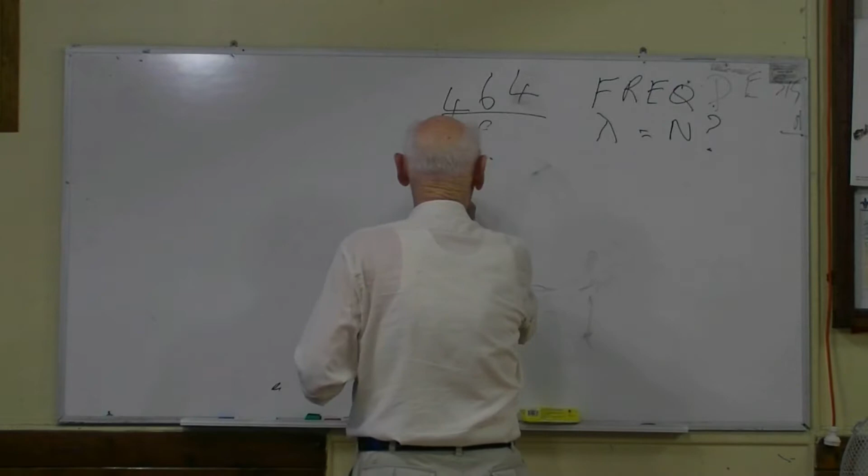Okay, so here's our length, 464 over F. So we go ahead and cut our antenna. Let's say, for argument's sake, I'll get my calculator out here. It's talking to you. Okay, we're going to build a 40 metre half-wave dipole. So we put in all clear. 464 divided by 7.1 equals 65.3521126.

65.3 feet. And now that we know it's going to be roughly 66 feet apart, we need 2 masts to hold it. Ideally 3, as a matter of fact, because you have sag in the centre. If you have 3 masts, you can lift the centre up where it should be, not down, but up there. So ideally 3 masts, and you need slightly more than 65 feet between them, about 66 feet.

So you get your wire out, hook it up, cut it to length, put it on insulators, and finish up with something that looks like this. This is an insulator at the end, and that's an insulator at the other end. These are halyards which you use to pull it up, and in here you feed it by whatever means you've decided to feed it. Ideally it should be coax cable, but there are other ways of doing it. Now you put it up and check it for operation.

The best way to do this, if available, is with various forms of antenna analyzers, which come in a wide range of prices. There's a relatively inexpensive one made by MFJ and it works all right. There are others which are more elaborate, giving you a computer output, which is valuable because you can store the results and later do another test to find out if it has changed, in which case you can do something about it. But if you only have pencil figures of impedance or SWR at various frequencies, you've got to keep that in a book somewhere so you can get back to it.

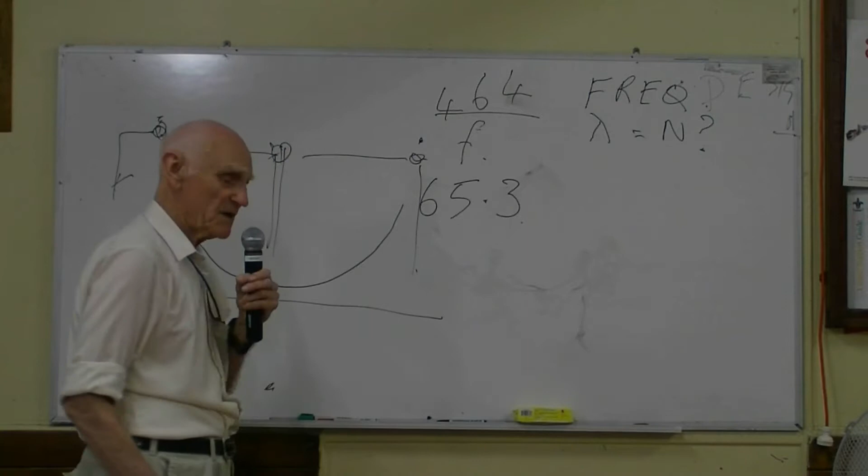Okay, so you check it out. The simplest way, if you don't have special gear, is to draw yourself a chart and check the SWR across the frequency range. Now, the position of minimum SWR tends to be the resonant frequency of the antenna. There are other snares involved here, but let's assume for the moment that's a perfect statement.

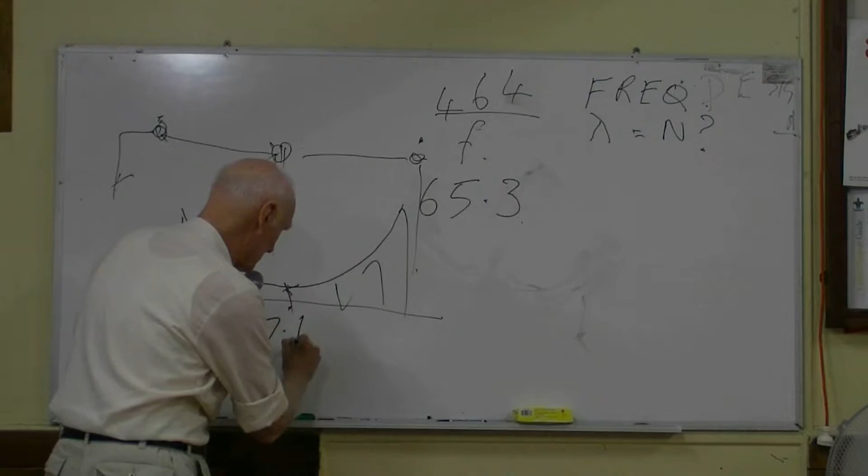Okay, let's say you've already designed it for 7.1 megs, but when you did the testing, you found it wasn't 7.1 megs with your antenna. It was somewhere else, might have been, say, 6.9. This is not where you want it to be. So what can you do about it? The result you've got is the result you're getting at your particular installation, due to the capacitance of your antenna to ground, probably to the roof of your shed, or the next door neighbour's shed, or his car parked in the yard. All of these things can change the resonant frequency of your antenna slightly.

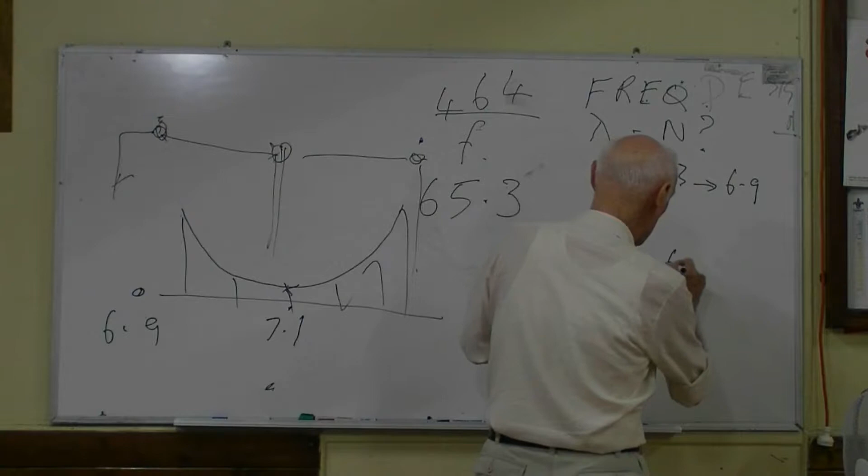However, you are stuck with your environment. If you have actually measured the length of the antenna, let's say you cut it to be, what did we say, 65.3? Yeah, 65.3, and that gave you 6.9 megs. So one thing you can do is some reverse engineering and calculate backwards. So in this equation, you've got a constant divided by 6.9 equals 65.3. So you multiply those two. All clear.

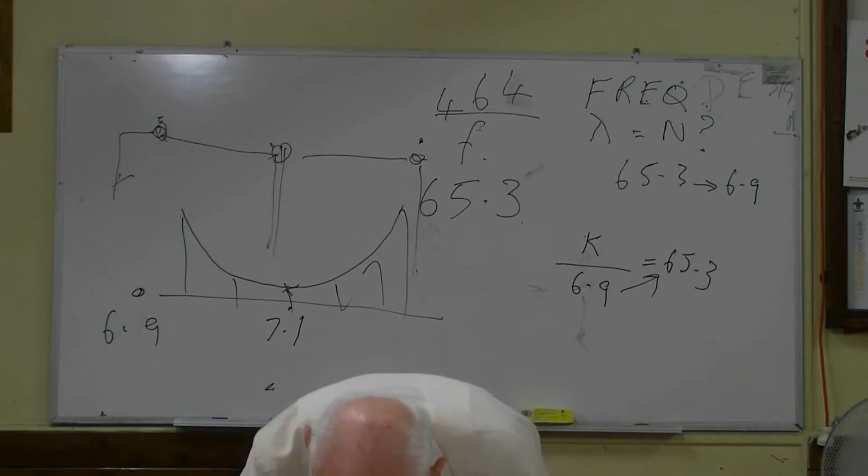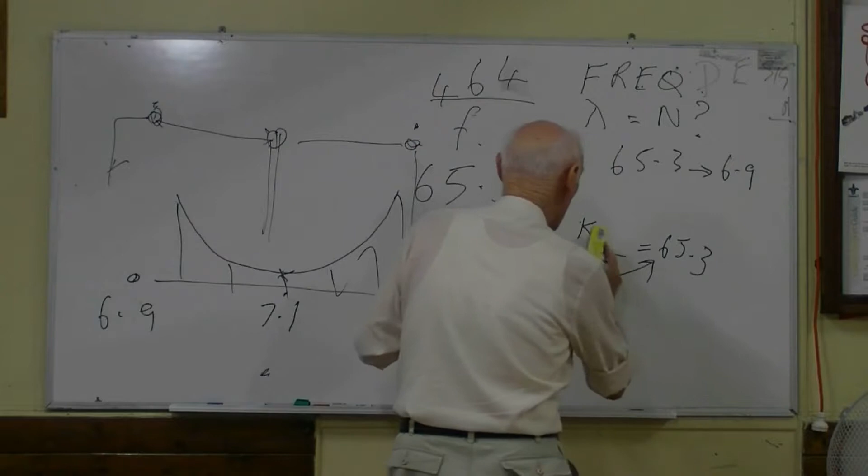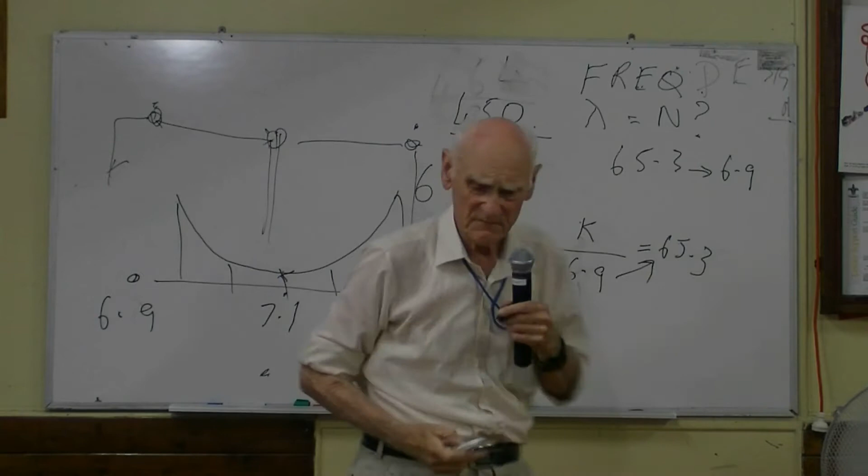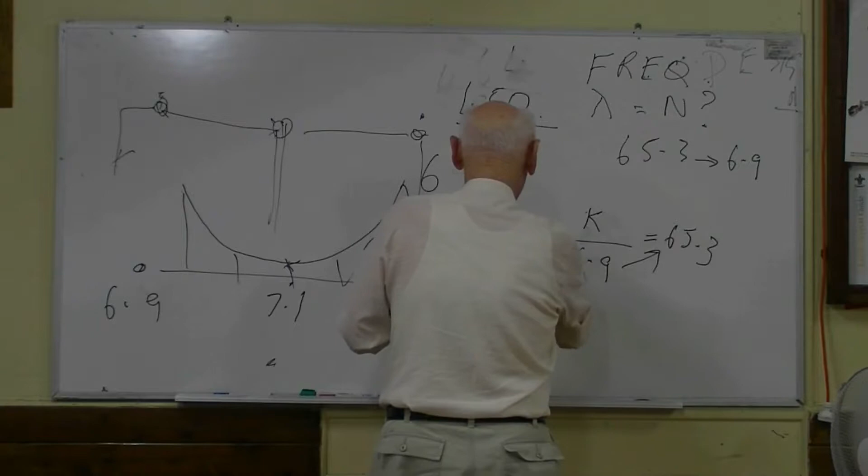6.9 times 65.3 equals 450.57, so 450. We know that in our particular environment, the correct constant to use in this equation is not 464, it's 450. So we still want the antenna to resonate on 7.1 megs, so we do that. 450 divided by 7.1 equals 63.38028169, so 63.38. So you know now that you have to adjust the antenna to that length.

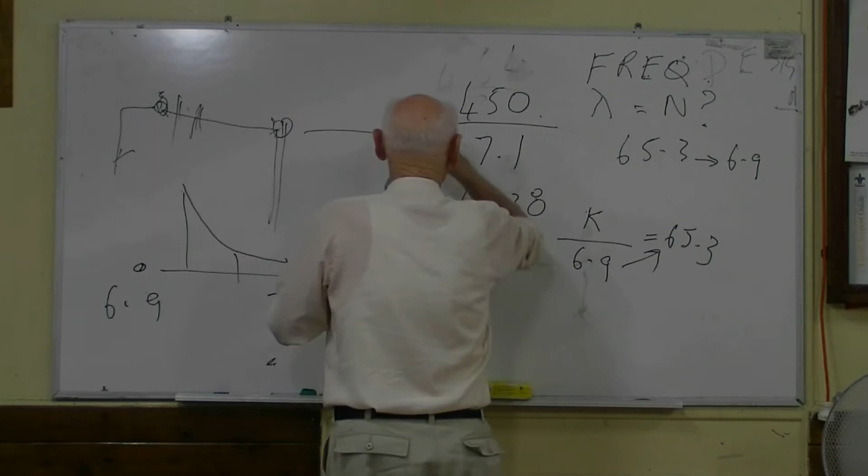That's the simplest way to do it. You can, of course, crawl up and down, or lower the mast at each end, chop 2 inches off there, chop 2 inches off there, put it up again, do the measurements, do another curve, chop another 2 inches off here, chop another 2. You could spend the rest of your life at that. You'll probably eventually get there. But I have a friend who went through this exercise recently, and he did it 6 times. He thought, oh, to hell with it, and he cut off 6 inches at each end, and he got it fairly close to the mark.

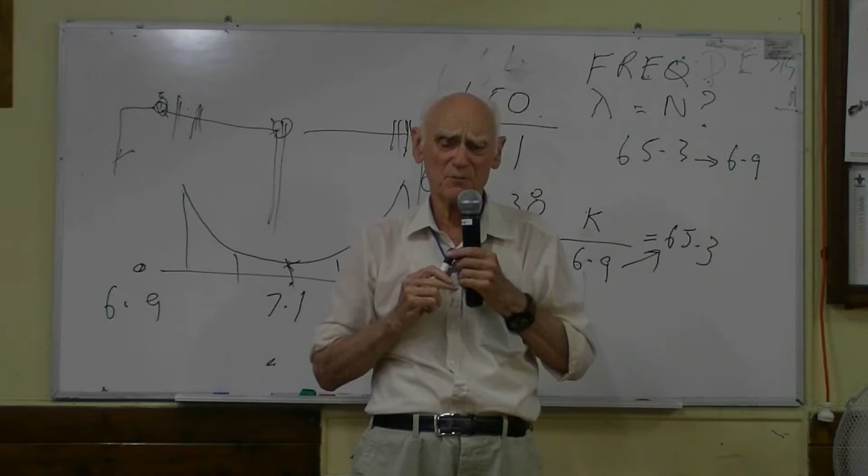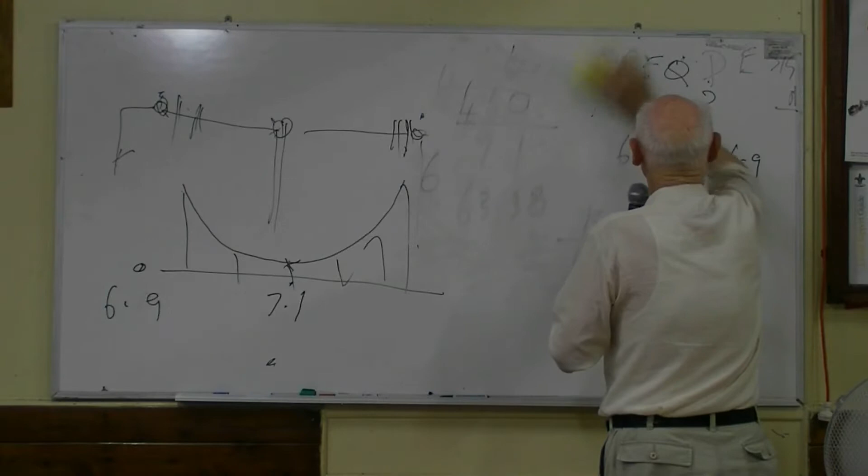Now, in comparison with this, I had Chuck help me put up a new 40-metre antenna some time ago, and it was an off-centre fed dipole, which is sometimes called a, what do we call it, something Carolina Windom, yeah, something like that. And I have grave doubts about the virtue of having an antenna which is not balanced, but in this case I needed to do it because I had recently put up a 3-element Yagi for 20, 15, and 10, and my G5RV was causing great problems because it was beautifully resonant at 20 metres, and it totally stuffed up the pattern of my Yagi. So I had to take down the G5RV, and I needed an antenna for 40 metres.

Well, by using the off-centre fed one, I had a situation like this: northern mast, shed, southern mast, central mast. Now, by using the off-centre fed antenna, I was able to do that. Insulator. And the Yagi, which was about here, was therefore somewhat divorced from the new antenna in comparison with the way it was with the G5RV. So it now works fantastically well as a transmitting antenna, but don't ask about the noise.

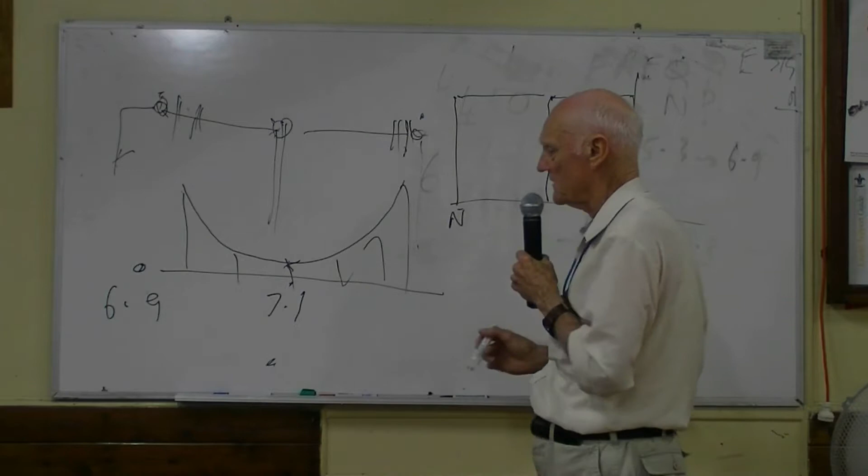Okay, so I now found that I had to change the length, so we dropped it down, we measured it so that it conformed to the new calculated length, put it up, hooked it in, did another frequency run on it with my MFJ impedance bridge, and we found it was resonant at 7098, and I said, Chuck, that's close enough. So this technique gives you a way around it. That parameter, that 468 that you find in the textbooks, it's pretty close, but it's not the figure that you're going to get at your location. How close it will be will depend largely on all those other imponderables that the guys who wrote the antenna handbook didn't know about, didn't know that you had in your backyard. So this gives you a way around it.

The next thing is that I'm reminded of a film that featured Danny Kaye. I can't remember the name of the film now. It might have been Danny Kaye Wonder Man or something like that. Anyway, he started off by saying, 'This is a story, and like any good story, it has a beginning, and a middle, and an end.' And that's the way it is with aerials. They have a beginning, they have a middle, and an end.

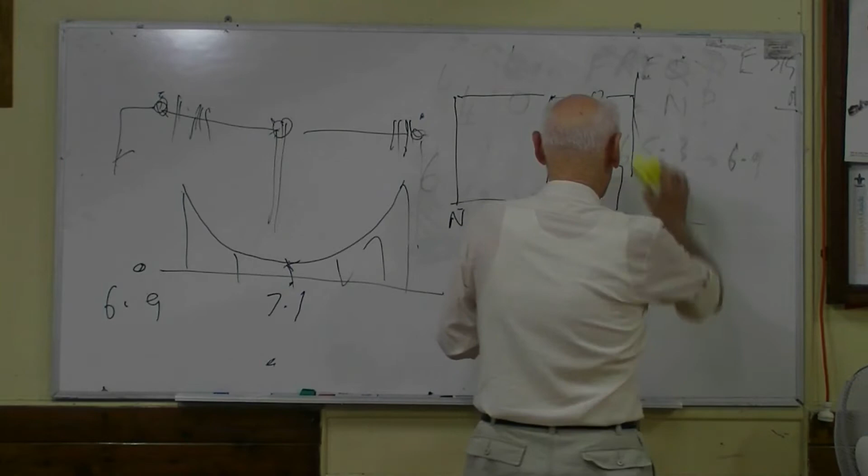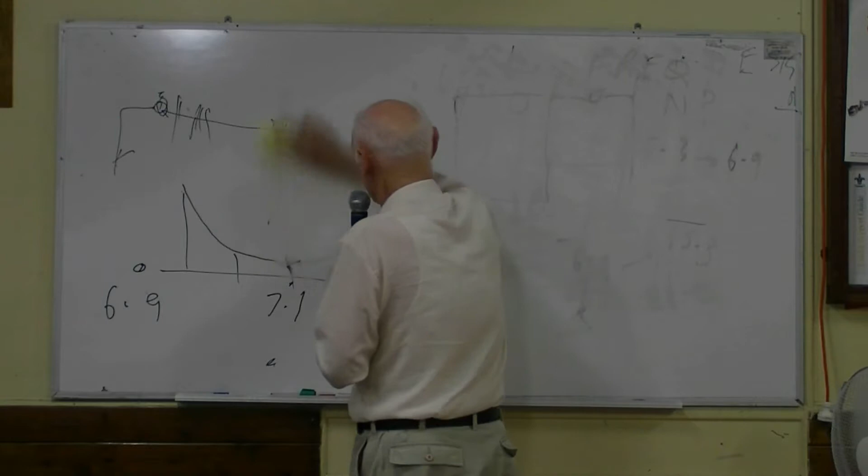By means of coupling into one of those three areas, you can actually get it to accept power and radiate your fantastic signal all the way around the world. So you have to decide then exactly how you are going to feed it. Are you going to feed it in the beginning, in the middle, or the end? And that will determine largely the sort of feed line which you are going to use.

Now, when you talk about dipoles, you tend to think about centre-fed antennas. And who can tell me what the impedance is at the centre of a dipole? 75? 75? Any more starters? 72? 72? 72? Anybody else? Okay, well, I didn't give you all the information. The correct answer is, well, it depends. And it depends on what.

I need two strong men. Advance front and centre, please. Check the seats. Put the young bloke up.

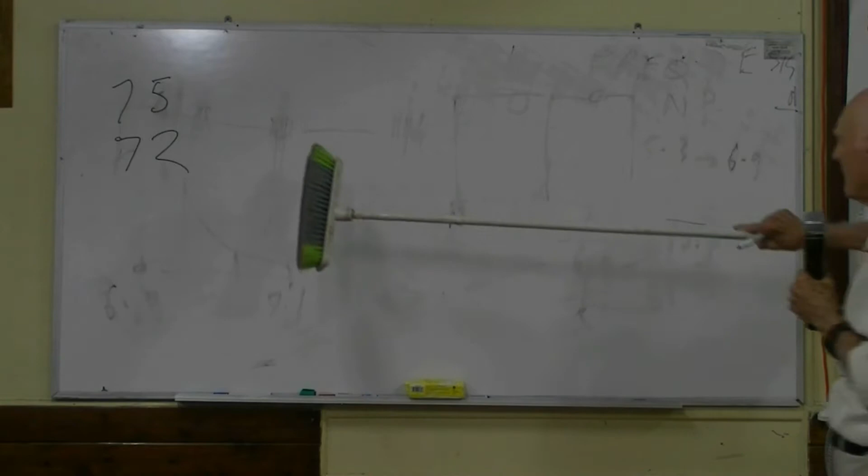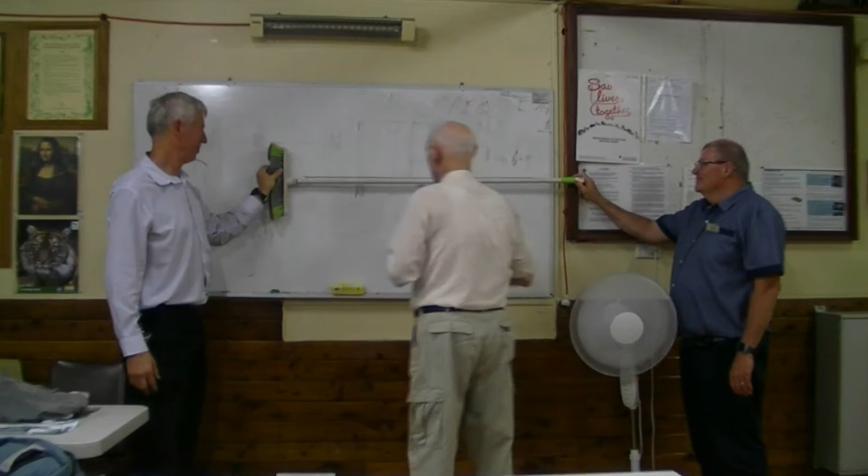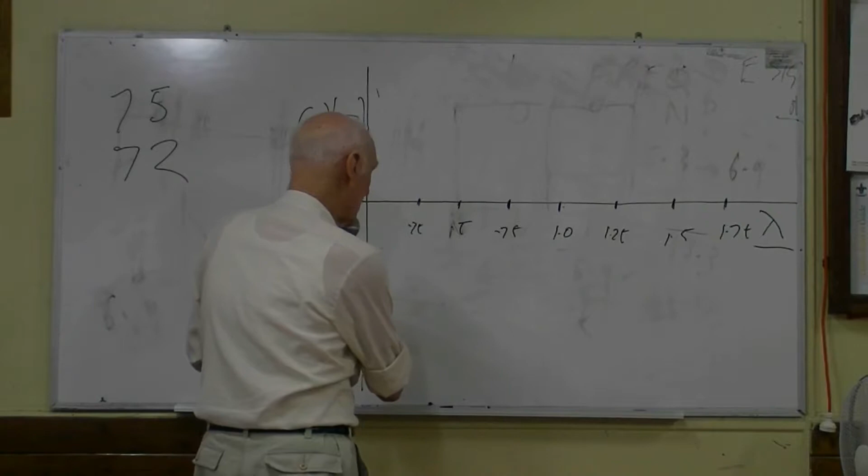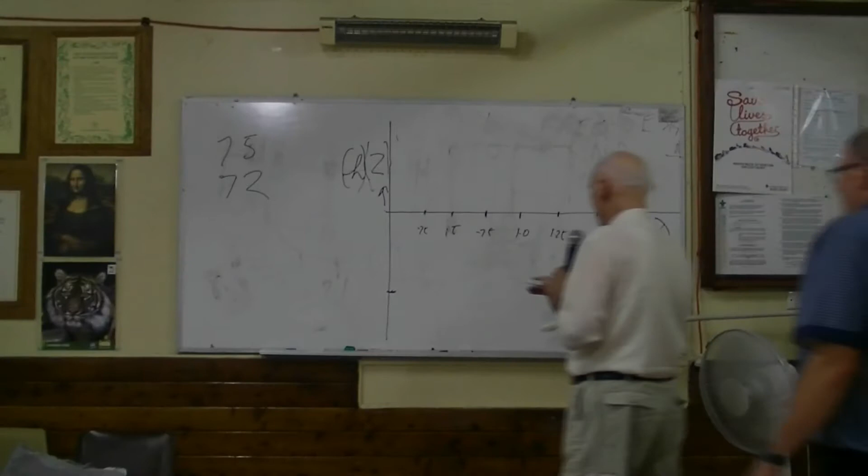I need my two men again, please. You need the broom. Okay gentlemen, I want to draw a line across there, parallel to - up a bit there I think. Up a bit. Cool. Okay, there we go. It's a wonky broom.

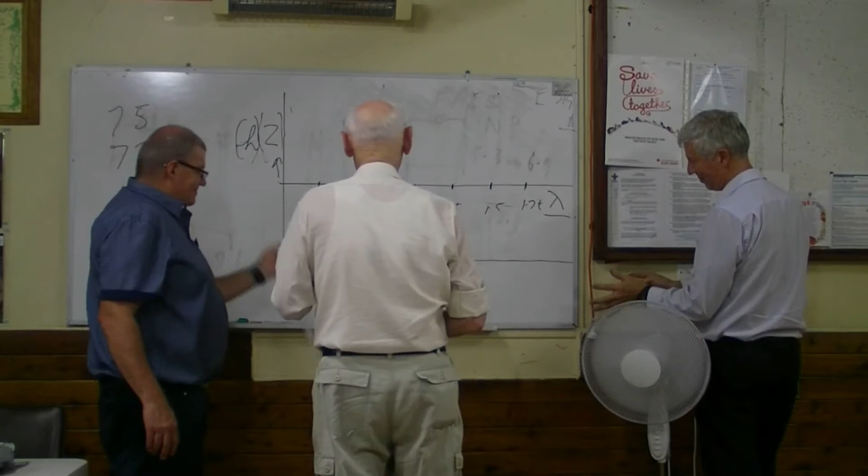When this is zero height here, ground level - if you have your half-wave dipole at a very low height, impedance is somewhere down here. Don't ask me exactly where, because it depends on where the real ground is. If you live on the beach, that's one figure. If you live in the mountains, it's somewhere else. If you live in my place, it's about 3 feet above sandstone. So you measure the impedance at various heights, and you get a curve that goes something like this.

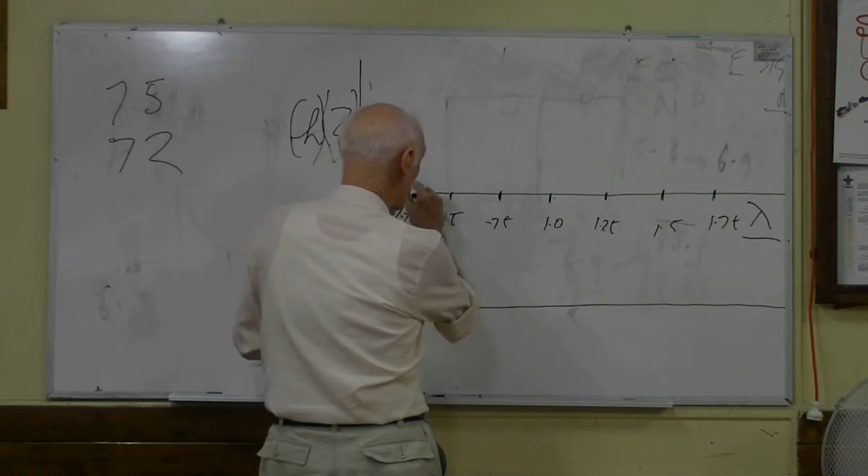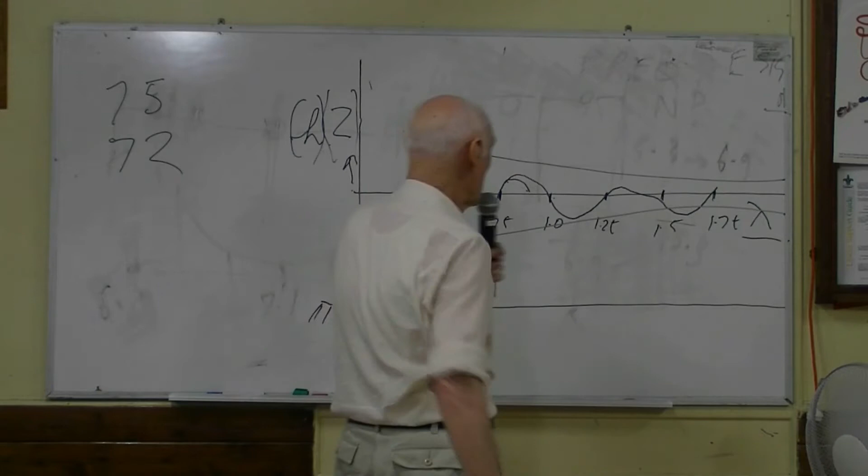And in fact this curve is like that. The mathematicians will say that if you take it out to an infinite height, this curve is asymptotic to 73 ohms or thereabouts. So the actual impedance depends on the height above ground.

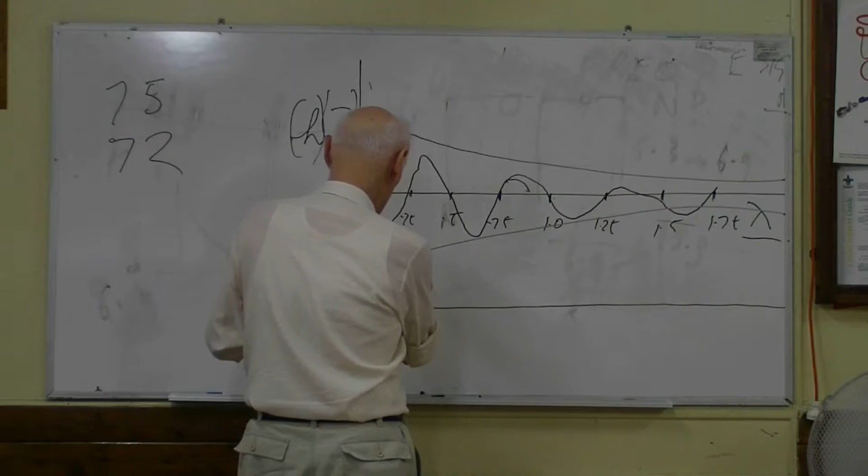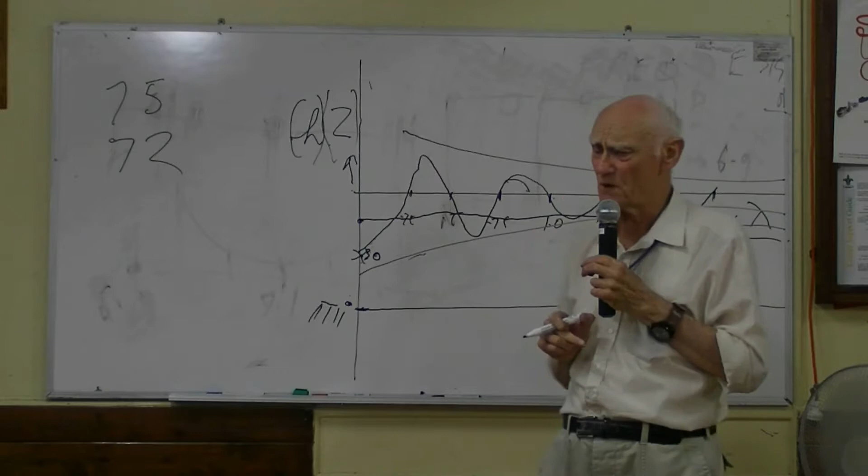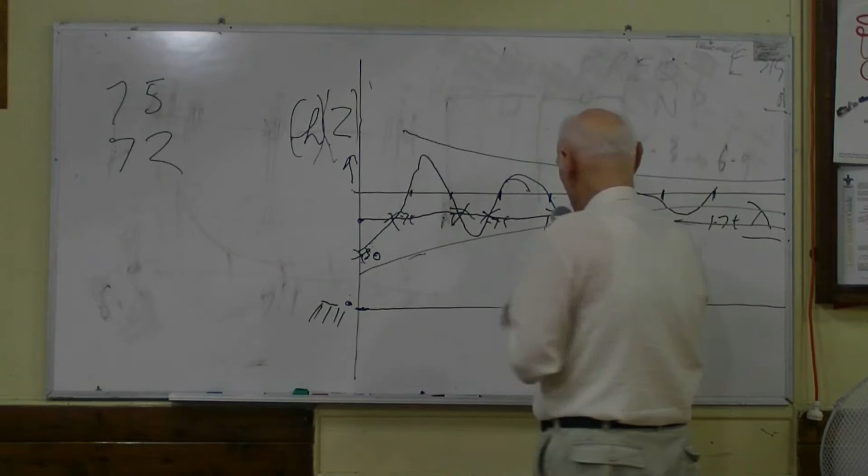So we tend to think of the best antenna as the highest one you can get, and there are good reasons for thinking that way. But if you're one of those people who think it's absolutely important to have the SWR as close as possible to 1.0, by picking a height at which it's 50 ohms you can achieve that much more readily. That means it may pay you to raise or lower the antenna if you're trying to get the impedance as close as possible to 50 ohms. Personally I have never done it, but I know people who have and claim it was worth the effort.

There is a snag here, of course, and what is that? Well, we are fortunate to have more frequencies available to us than the armed services, and we should think about that. The point is we can operate over a wide range of frequencies.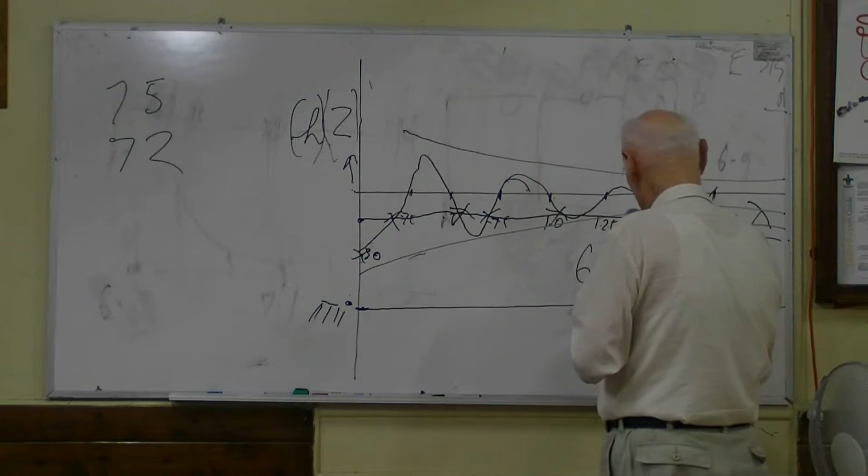So what is a quarter wavelength? A quarter wavelength at 80 metres is about 66 feet. At 40 metres it's about 33 feet. At 20 metres it's about 16. By the time you get up to 10 metres it's only about 8 feet. So if you select the height for one particular band, it's not going to be much good for the other bands. But if you're aiming for a particular band, it's worth thinking about.

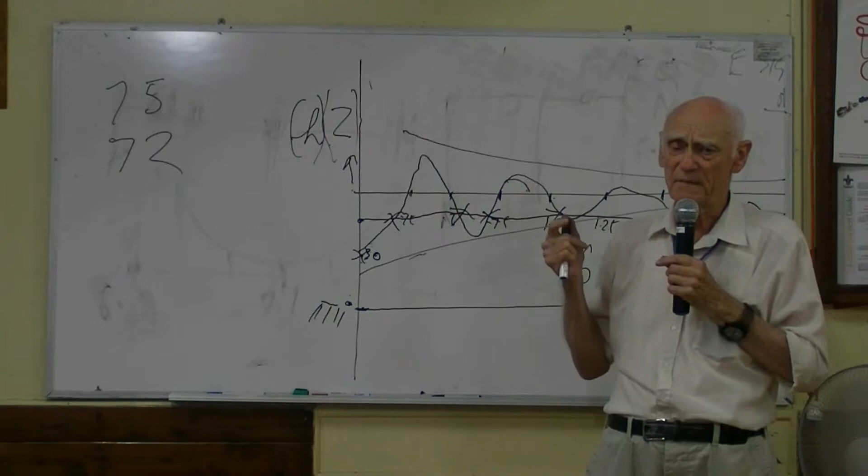So we can arrange it, by suitably adjusting the height, to get the feed impedance at 50 ohms instead of the 73 we've all learned at mother's knee. And you can feed it with 50 ohm cable and a 1-to-1 balun, and that works out rather nicely.

But what about if you don't have any coax cable, or can't afford it? Coax cable was known around 1940, but hams couldn't afford to buy it. Some idiots started a war, and as a result they started putting radio gear on ships, where it became necessary to have shielded cable up to the antenna to cut down noise, and for various other good reasons. When there's a war, there's always money available for developmental work, and probably the area where the money was best spent was in the development of coax cable. After the war it became more popular for hams because we could get it in all sorts of ways - like the stuff I had, which probably came back from Morotai, and was green with verdigris, but it worked after a fashion.

My theory about antennas is they all work. Some work better than others, but generally speaking we can't tell the difference. For most of us, the criterion is you put it up and you make contacts, but you don't really know whether you should be doing better by making some other changes. If you listen around the bands, you'll hear that some people have much better signals than others, and it's not always due to the fact that they're running a kilowatt.

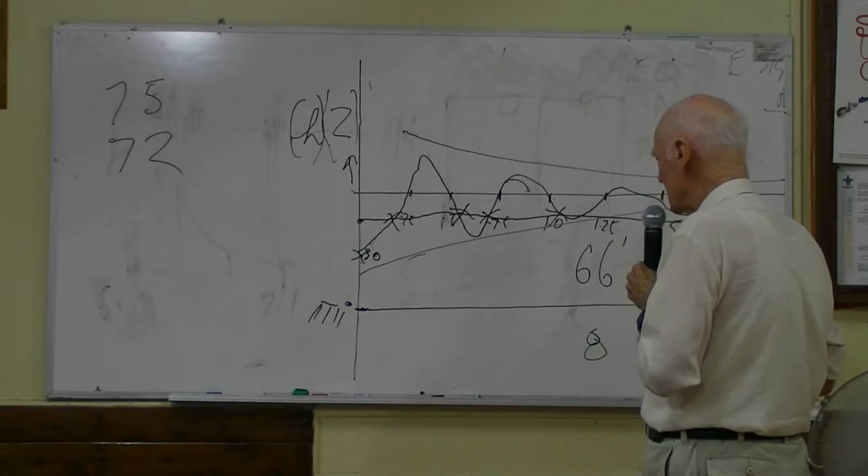You have to decide what you're going to use for coax for feed line. I've lost my...

Before the war, hams used stuff called open wire line, made out of copper wire and things that nowadays you'd call paddle pop sticks, although I don't think there were any paddle pops in 1938. You have two wires and a series of insulators across. The people who could afford them in 1938 used Pyrex glass insulators, and there were some beautiful insulators made. They sort of looked like this.

They were a corrugated thing out of Pyrex glass, and you could subject them to a hell of a lot of strain. You just put the wire through here on one end, through here on the other end, and it took a lot of breaking, although I understand rifle fire was very satisfactory.

So you can use open wire line. The surge impedance of the open wire line is a function of the spacing between the two wires and the gauges of the wires. In the ARRL handbook, which I suggest is probably the most valuable book you could ever obtain, there's a series of charts which will enable you to come up with that.

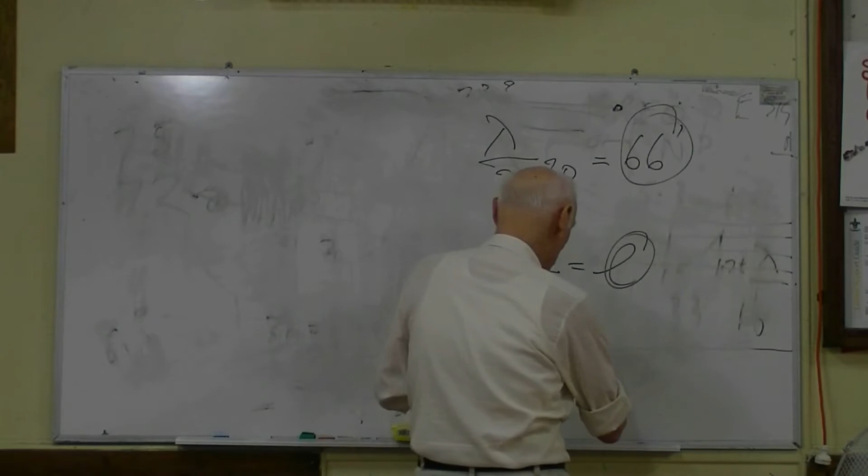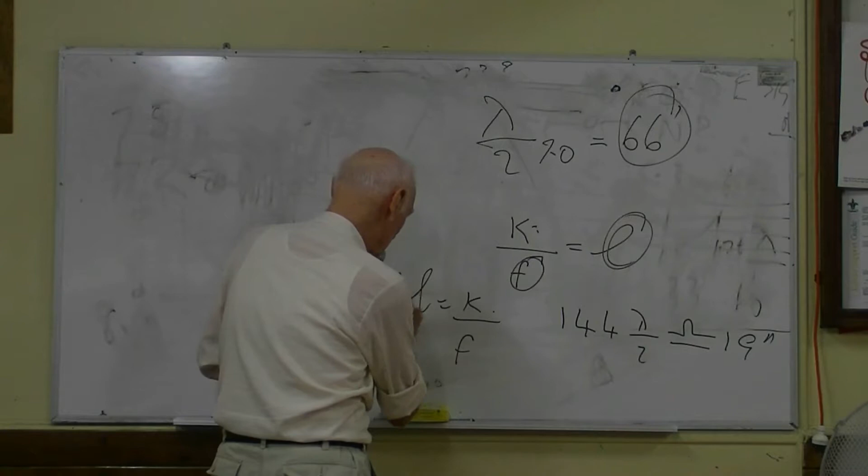Much the same thing applies at VHF. If you remember that 144 half wave is about equal to 19 inches, the same thing applies here: L equals K over F, the parameter divided by the frequency. So 19 inches equals L over 144, or maybe 146. You multiply those two out - let's say we decided it's 146. All clear: 1,4,6 times 1,9 equals 2774. So this constant here is 2774.

I happen to know that's not right - I think 2640 is closer to the mark. So maybe that wasn't 146 megs, maybe it was 144. Let's try again. All clear: 19 times 144 equals 2736. Okay.

That's interesting - anyway, that's the basic principle. But before you do the exam, find out what the ARRL says that factor is, because obviously I didn't remember it correctly. Max points out that's a quarter wave up there, not a half wave - absolutely right, 19 inches should have been 38 inches. Thank you for picking that up. All right, so the half-wave dipole is probably the most commonly used antenna.

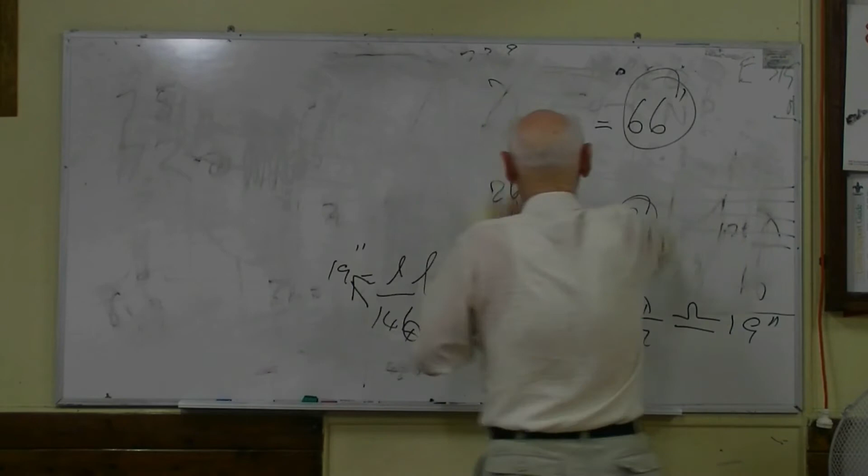Nowadays there is a problem, and that problem is noise. It's said that a loop antenna is much less sensitive to noise pickup because it's basically picking up energy from the magnetic field, as distinct from the electrical field. Probably the most convenient way to build a loop for those of us with only small backyards is to use the delta loop.

The virtue of the delta loop is that you only need one mast. There are various ways you can build it. You can make your antenna like that, and feed it up there, or there, or there. In other words, it has a beginning, a middle, and two ends.

Such an antenna has an input impedance of somewhere about 100 to 120 ohms. I mentioned earlier that I'm now using an off-centre fed dipole, which also has an input impedance of about 120 ohms. To cope with that, I use a special balun with two transformers: the first converts from 50 ohms to 120 ohms, the next goes into a 1-to-1 balun, so it comes out at 120 ohms into the antenna feed point.

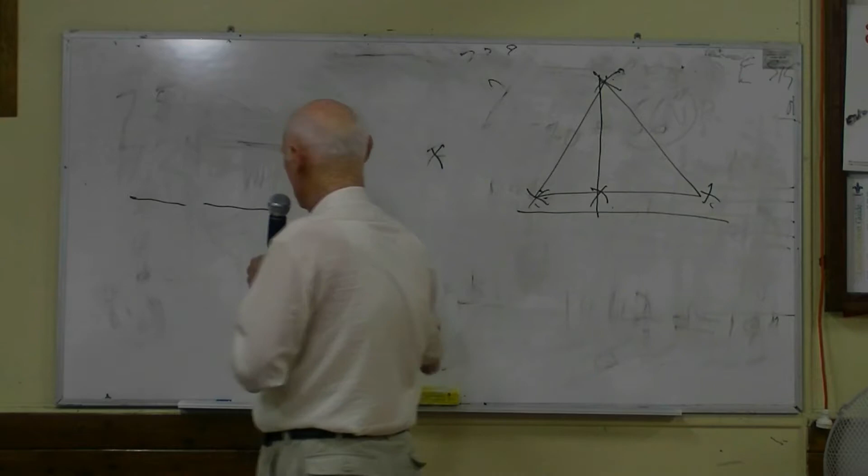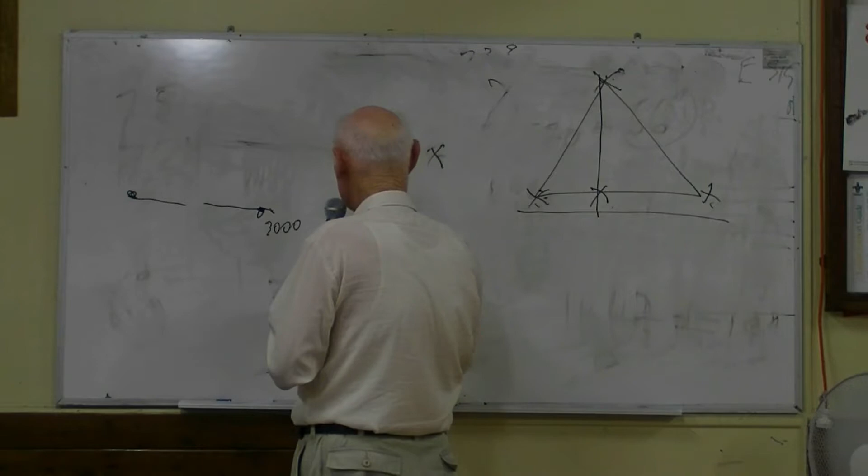If you have an open antenna such as the half-wave dipole, where is the end? It's called end effect - you've got this thing with a finite impedance, somewhere about 3,000 odd ohms, maybe at the end. But this is quite different: it's not open circuit at the end, it's a continuous antenna. So end effect is different in this situation compared to that one.

So a one wavelength loop doesn't conform to the other dimensions you've made. In fact, for a one wavelength loop, it's roughly calculated like this. If you want to make up a delta loop for 7.1 megahertz: 1002 divided by 7.1 equals 141.1267605.

141 feet. Now, what would you have thought one wavelength would be at 40 metres? What did we calculate was a half wave earlier? 65, wasn't it? 65, exactly - so that was a half wave. So you'd think if 65 was a half wave, the full wave would be 130. But we just calculated 141 feet. This shows the difference between the end effect we had to consider with the half-wave dipole's open ends, compared to a closed loop antenna.

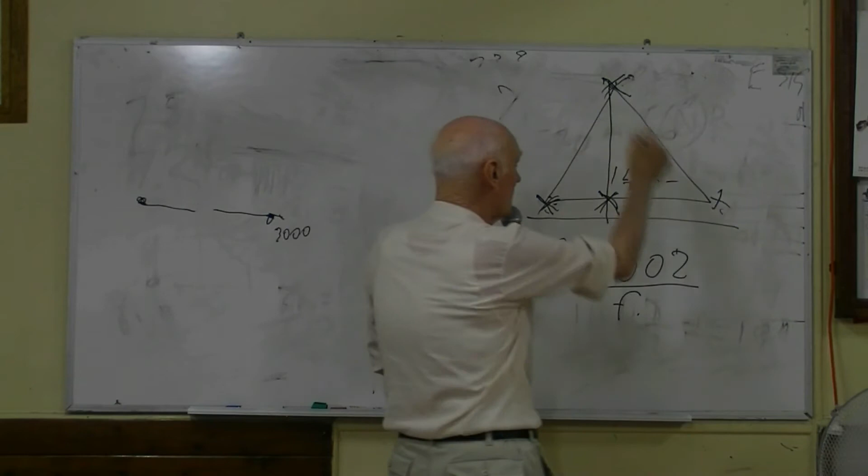The feed point is about 120 ohms. Exactly where you feed it will depend largely on where the major polarization will be. If you feed it here, it's largely horizontally polarized. If you feed it up here, it will tend to be largely vertically polarized, and down here it probably can't make up its mind. That may be an advantage because there may be directional effects - it may be that feeding it here makes the directivity tend that way.

How can you check this? There is a method available to all of you, and I'd say probably none of you have thought about it. That's what I'm trying to do tonight - help you develop the capacity to think about these things. Does anybody have any idea what I'm alluding to? Okay, not a dog stirred.

I think it would be true to say that every one of you here would be entitled to operate on the 2 metre band, 144 to 148 megacycles. Let's say, for argument's sake, that you want to put up a loop for 20 metres. I know some of you can't operate there, but this will give you the incentive to work towards it.

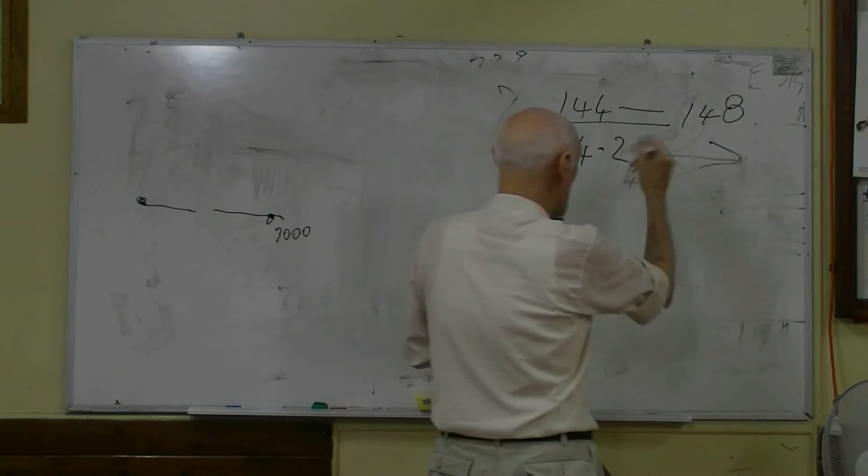You divide 144 by 14.2. What's the answer, roughly speaking? 10. Exactly. So that means in your own backyard, you could very easily make up a loop antenna of this type, cut it for 144 megahertz, and go around with the field strength meter and investigate the performance. If you had, say, a sheet of galvanised iron underneath it, you could simulate a perfect earth, and then raise it and lower it to see what happens to the field pattern. I look forward to hearing that somebody here has tried to do it.

It's been done before. In fact, it is the technique used by the National Bureau of Standards when they come up with a design for a new antenna. They do their modelling probably at microwave frequencies because the measurements are a lot easier and they have access to perfect antenna ranges. We don't. We have our backyard, or maybe a field day. There's one club that every year goes to Alice Springs or Innamincka or somewhere, and they play with all different sorts of antennas, investigating the effect of different feed systems and heights and so on. You can do that in your own backyard at 2 metres. And as I said before, I look forward to hearing somebody say they have done it.

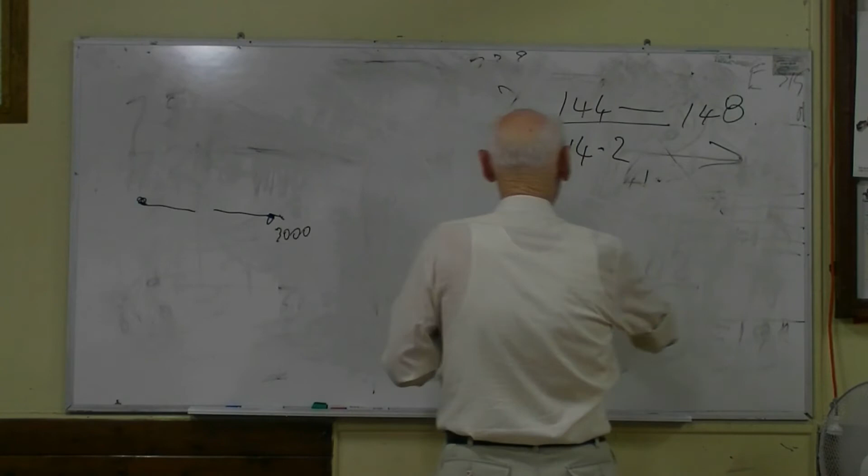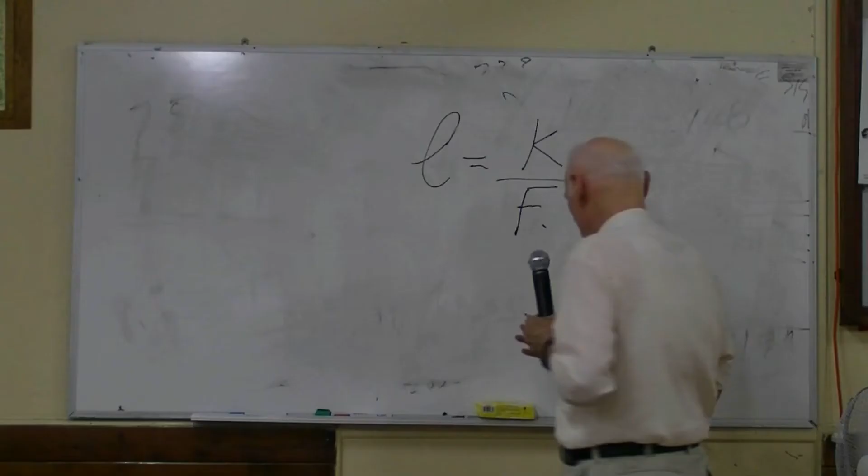Now, there are other sorts of wire antennas, and at some stage most people come up with the idea of using a vertical. That's not a bad idea, you might think. Why? The idea of using a vertical, because it doesn't need a lot of real estate.

Have you ever visited a broadcast station? Where do they have their antennas? Out in some bloody big paddock, frequently in the middle of a swamp. Why is it so? Well, I think a standard broadcast transmitting antenna uses about 232 radials.

I have met one ham who had a vertical for 160 metres with that sort of setup. The reason being he used to be the technician at the broadcast station. The broadcast station moved. They left the antenna and the earth mat behind, and because he had been the technician resident where the transmitting site was, he bought the house and the antenna. So he now had a perfect 160 metre antenna with 232 radials or whatever it was.

And that's the problem with a vertical antenna. The closer it is to the ground, the more radials you need. If you have it up high, such as a thing like this, four radials work quite well, really do quite well. The snag here is that it has an input impedance of about 33 ohms. Now, again, you want to use that beautiful 50 ohm coax cable that you managed to get.

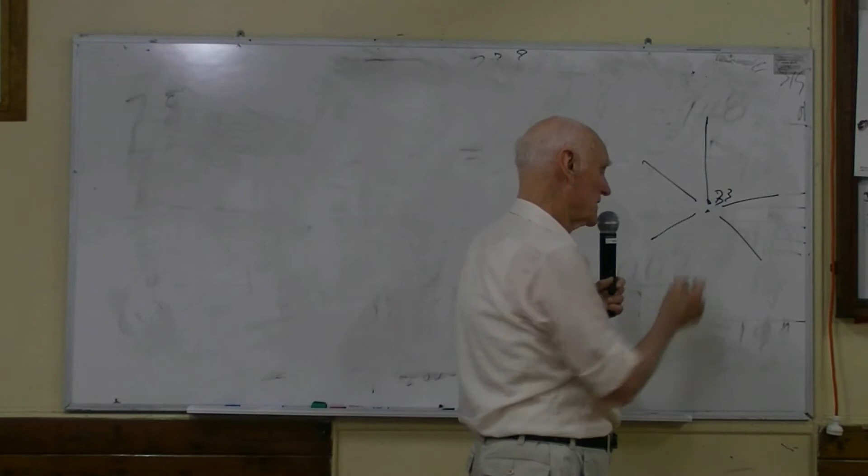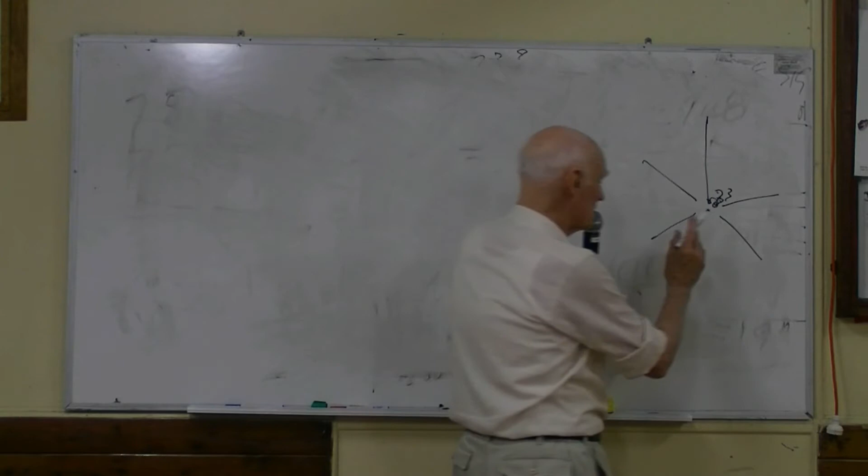So what can you do about it? Well, you can put in some form of a little transformer there, and that works okay, particularly for working at only one frequency. But a simpler way is to actually droop the radials down, like that. And in vertical, it looks like this, okay? You can find a point where by suitably altering that angle alpha, you can come up with a feed point impedance of 50 ohms, which is very nice.

I have a book written by a gentleman called Commander Lee, who was a communications engineer in the US Navy. The Navy's very enthusiastic about verticals, because there's not a lot of real estate on a ship, and you can throw up a vertical and you've got a beautiful ground plane. You've got thousands of tons of steel underneath you, and it works quite well.

But a better way, particularly if you have an antenna you want to use on one frequency - I'm particularly interested in 10 megs because it's a frequency working rather well at the moment, and I'll show you some photographs in a minute - about every decade or so I get out Commander Lee's book and I read it and get very enthusiastic and I put up a vertical, and it lasts about 3 months and then I take it down. So nowadays if I ever feel a vertical coming on, I go and make a cup of tea and take 2 Panadols and lie down and wait till the feeling goes away.

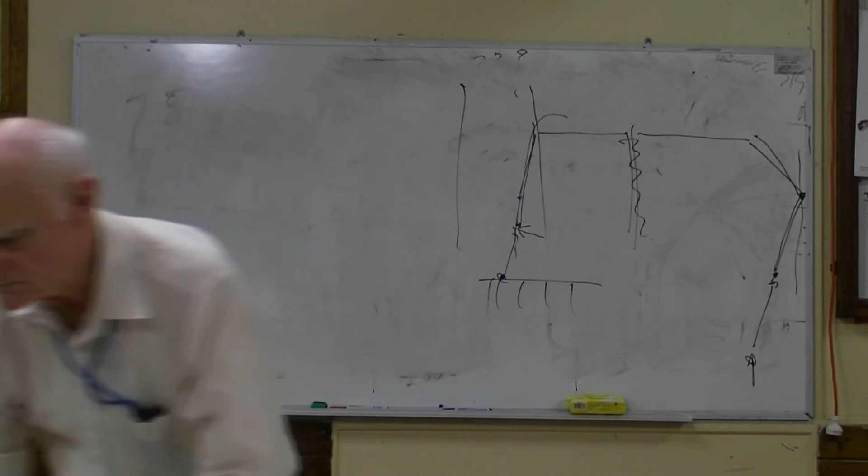Okay, this is the base of my northern mast. It was given to me in 1962 by the late Horry Young, VK2ARZ. He was posted to New Guinea. He was going to lease his house, and he didn't like the idea of leaving his beautiful mast behind. It was made out of a single piece of Oregon, 4 inches by 4 inches, and that's the section you can see there. That's all 4 inches by 4 inches. It was tapered to the top. It was 30 feet long, tapered and rounded, so at the top it was about 2 3/4 inches high. I've had that up now since 1962.

About every decade I take it down for sanding and painting. Unfortunately, that is very difficult to do nowadays.

Was it much binding in the marsh or the Goon Show? I think it might have been the Goon Show. There was a bloke who had this standard catchphrase, 'You can't get the wood, you know.' And that's the way it is. You try buying a piece of straight-grained Oregon, 30 feet long and 4 inches by 4 inches. If you can do it, please let me know.

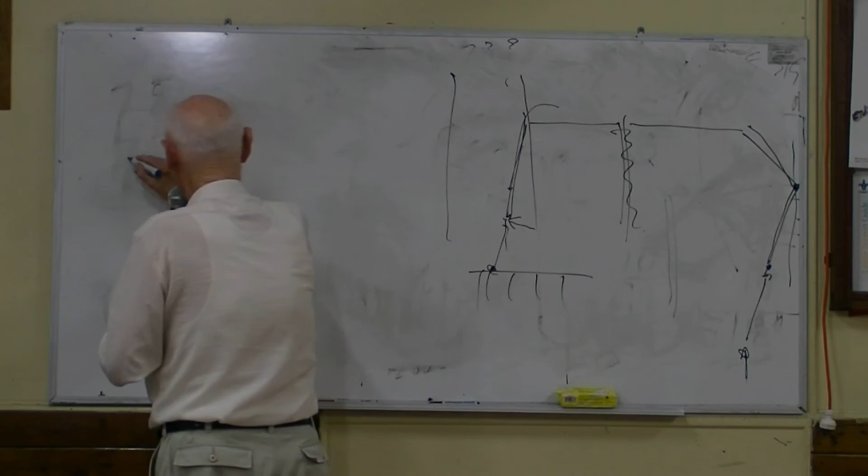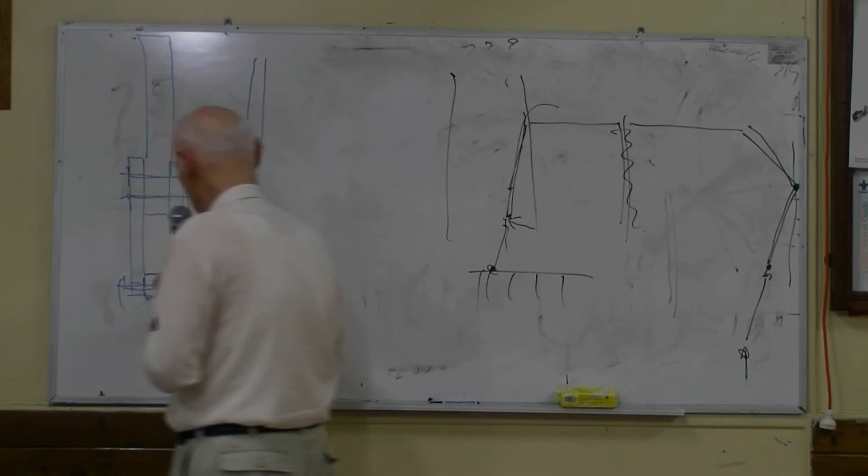If you start off with 2 pieces like that, and then you cramp another piece in there like that, and you then put a piece down here, you can put a bolt straight through it. That's in that view. In this view it looks like this. But in my case, this last little section, I have let in another piece of timber. This whole lot is glued together with marine glue, and then I put stainless steel bolts through with very large washers on them. You have to turn the nuts up tight enough to hold it, but not tight enough to crush the timber. Why do I use stainless steel bolts?

Because bitter experience has shown me that the use of mild steel bolts, plated as they may be, eventually leads to disaster. And it works out this way.

You have a piece of timber, you drill a hole in it, you put a bolt through it. Now, the timber, bless its heart, contains sap, even though it's been kiln dried. It also accumulates moisture from the atmosphere, regardless of how diligent you have been about painting it and so on. There will always be some moisture in it. The moisture then starts to attack the bolt, and the surface of the bolt becomes rusty. And that's only the start.

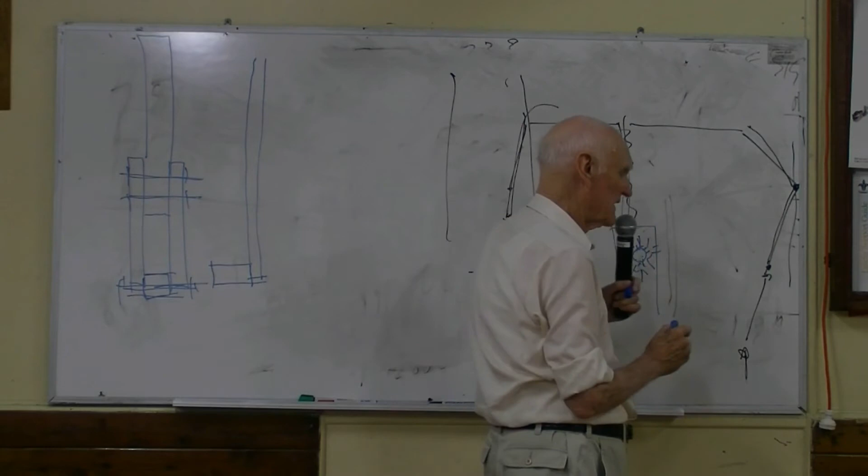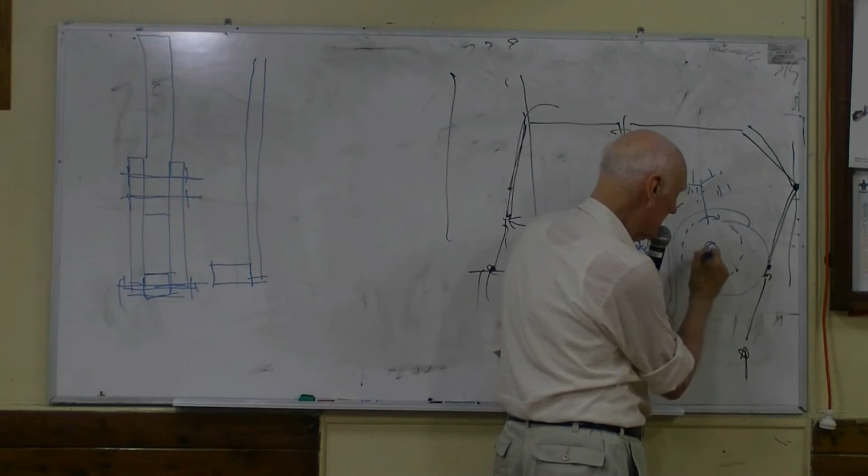The next thing that happens, it develops what's called dendrites. They're like little bits of pine tree - a bit grows out like that, and off there, and off there, and off there. And this is around the whole surface, and that starts to attack the bolt. I've seen a 3/8 bolt which was actually only about 1/8 of an inch in diameter, and the rest of it was made up out of dendrites. And it penetrates into the timber.

When you go to take it out, you can't shift it. The only way you can do it, you just keep turning it until you screw the nut off it. This is called wringing its neck. And then you can drive it out.

But if you use stainless steel bolts, fix and forget. You know, I'm 84 now, I don't have all that many years to go. But what I do know is I won't be replacing those stainless steel bolts. And they don't cost a huge amount of money within limits. The one that I bought to go here, to go through here, was longer than the standard length, and I think the factory must have made it specially for me, because it costs a lot more money than I really wanted to pay. But, you know, you pay your money and you take the choice. If you want that performance, that's it.

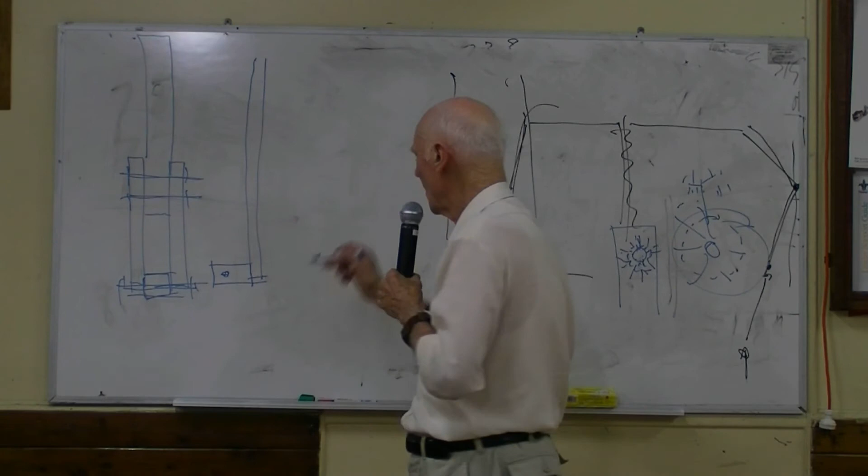Why did I build it like that? Take a look at it and you will see that it's connected to the end of my shed, and it's connected there in two places.

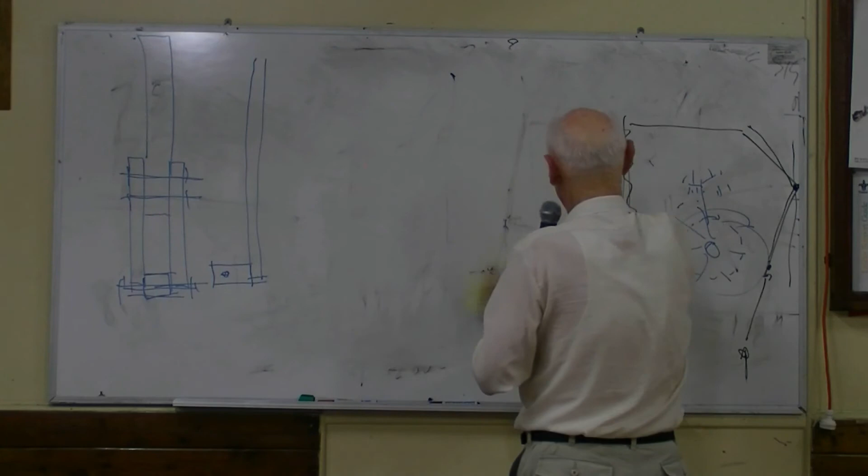Now at the top we have, I think the piece of timber is called the ridge pole? The one right along the centre of the roof. You have your roof like this, and you have a piece of timber that goes in like that. And these, I think, are called purlins, and these things are called rafters. Anyway, you've got a piece of timber - it used to be 6 inches or maybe 8 inches by 1 inch.

Now, inside there, in plan view, here is your ridge pole. I have installed 2 pieces of steel, which are actually angle brackets that I was able to buy from Mitre 10.

And it's so designed, I replaced these barge boards with timber which was about 10 inches by an inch and a half. The brackets go out like that. Here's our barge board. There's our barge boards there.

Now, when the antenna goes up, the antenna is here, and I have a piece of aluminium angle, about 75 millimetres by 75 millimetres, and a thickness of about 10 millimetres. Very substantial aluminium angle. I went to a factory near me and said, mate, I need a bit of aluminium angle about this big. If you've got something in the scrap bin... He went and came back with a piece about that long, which was enough for me to make up an antenna tow bar fitting for my high frequency mobile, with a few bits left over, including this piece here.

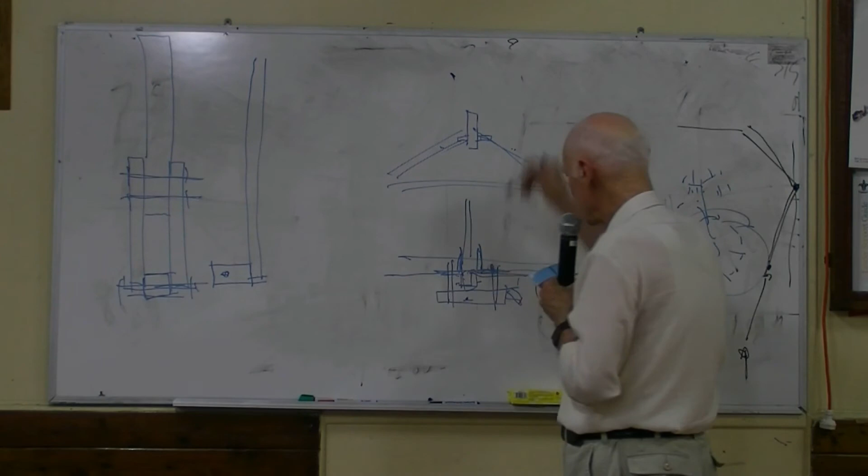So I now have stainless steel bolts that go through there, and the antenna is clamped. The fact that there's a hole there allows the water to go through. If you don't have that, it can accumulate around there and lead to all sorts of problems. The bugbear of amateur radio operators and masts is water first, corrosion second, avian terrors third.

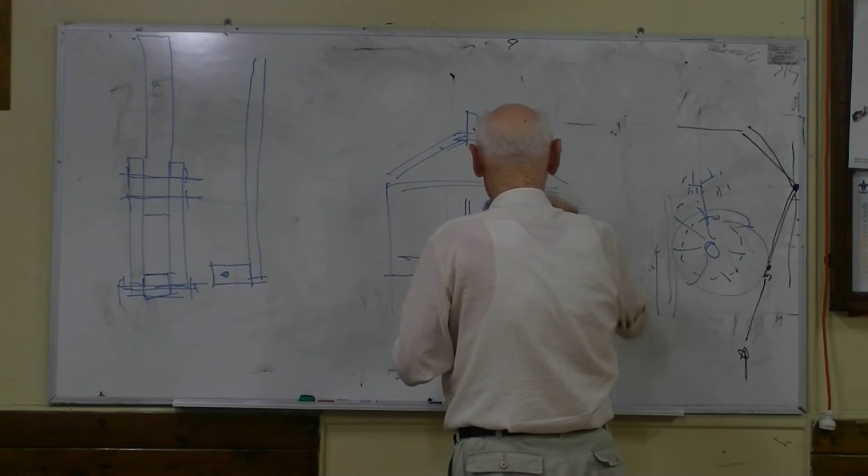And in plan view, it's roughly like this. The mast actually goes in here, out from the board, and there's a bolt which goes through like that, and then there are 2 brackets like this.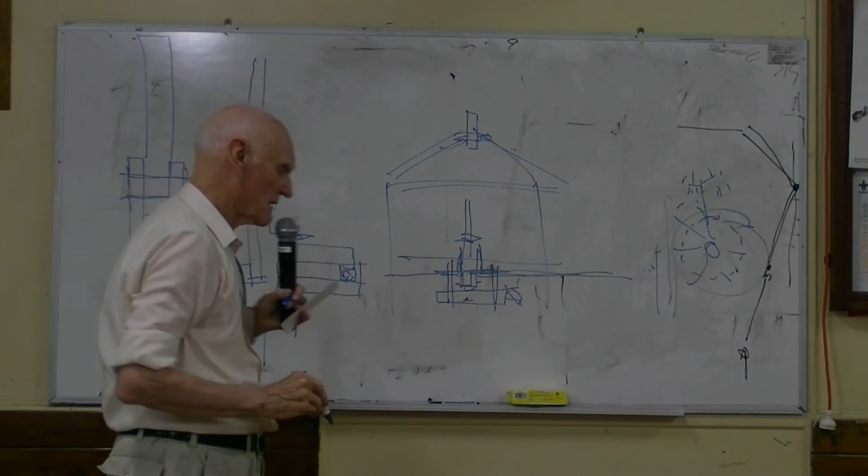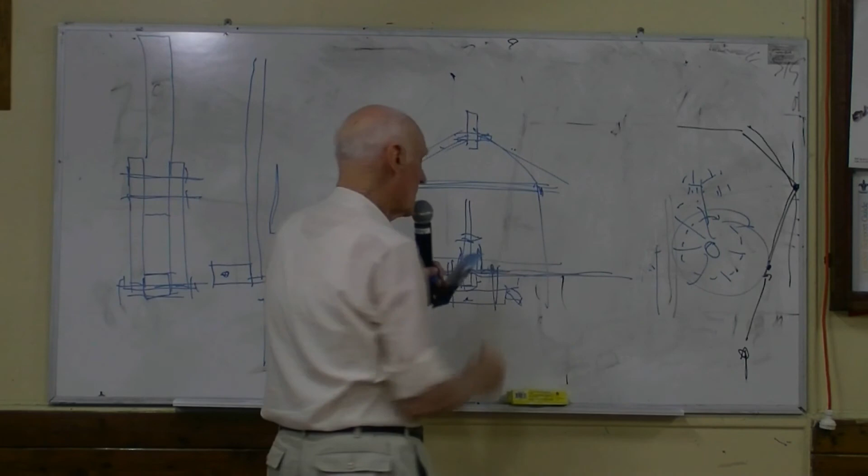I got those from Mitre 10 many years ago, and they are bolted into the timber piece which goes across here, which I have reinforced. It's not just the conventional end of the shed, it has other timber behind it which is bolted onto it to reinforce it. And the angle bracket is here so that I can...

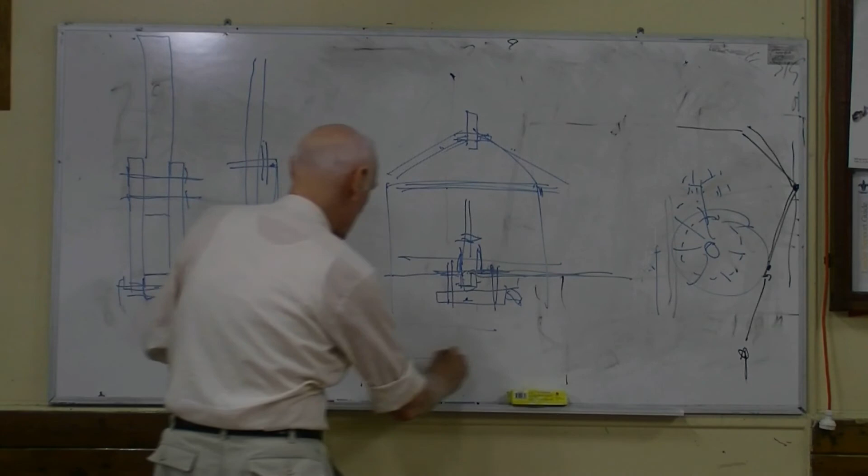undo this situation here, and the whole antenna will then rotate around. So it comes around like this and goes out like that. So the end of the antenna is out parallel to the carport, which sits just in front here.

So the end of the antenna is only about 8 feet above the ground. That means you don't have to go up there to do something about it. But what I do is I have stainless steel eye bolts. You may be tempted to use a pulley. Don't do it, please. Pulleys are bad news for antennas.

The halyards always jump over the edge and get jammed in between the pulley wheel and the side of the sheave, and then you've got to take it down anyway. The trick is that you use a stainless steel ring bolt.

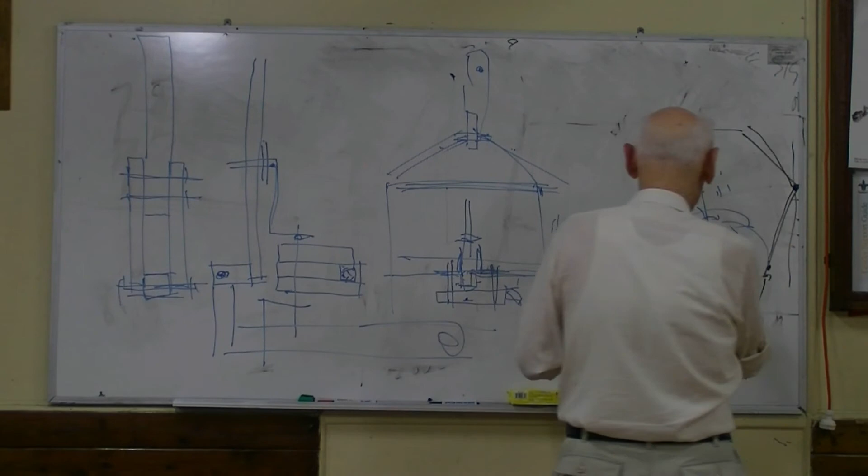And your halyard goes up through that. Because it's stainless steel, it's nice and slippery. There is no end to it, the halyard can't get caught. You might be tempted to use the garden variety ones that just click together. Well, in the end, the halyard will get through there. You can try putting it up there, but it doesn't make any difference. It'll still get caught. But by using a stainless steel ring bolt, you can put the halyard up and down, and that enables you to raise and lower the antenna.

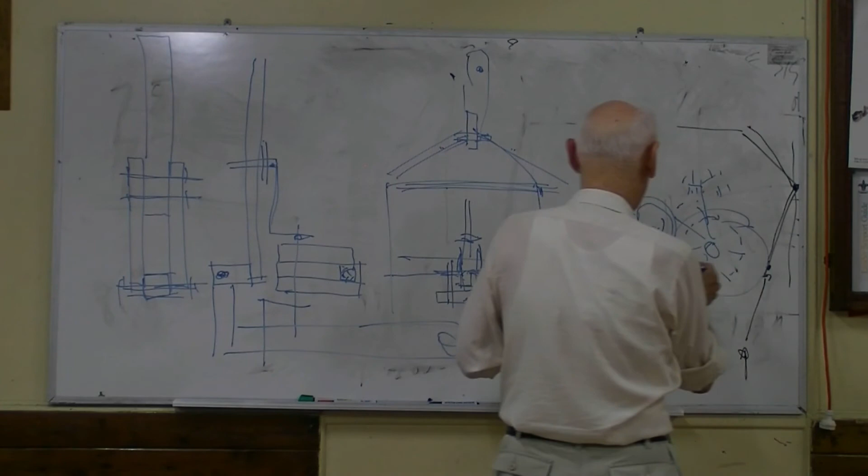With this system, make sure that you have sufficient halyard so that when the antenna's out here, you've got sufficient halyard so that the antenna is still within reach. It doesn't help if you run out of halyard with the antenna in that position, that's not a useful situation. You must work out that you have sufficient halyard so that you can drop it right down to the ground.

Okay, so now we've spoken about designing the location, designing the length, designing the construction. What is probably the most important aspect of the construction of the mast system? Safety.

I don't know about you guys, as I said, I was 84 a couple of weeks ago. I don't really enjoy climbing on ladders anymore. I don't want to have to go up there to do anything about the antenna, I want to do it down here. And by using a design of this nature, you can drop the antenna down without having to get yourself a skyhook and a harness and a parachute and a free ticket to St George Hospital.

Safety is the most important consideration. The next thing I've spoken about is corrosion and rust - the use of stainless steel hardware for the construction.

Where you put a bolt through the timber, use the largest washer you can get. There are three sizes of washers for most bolts - a small one, a medium one, and a big one. Use the big one, it has the maximum possible diameter. It reduces the bearing pressure where you tighten the bolt up on the timber.

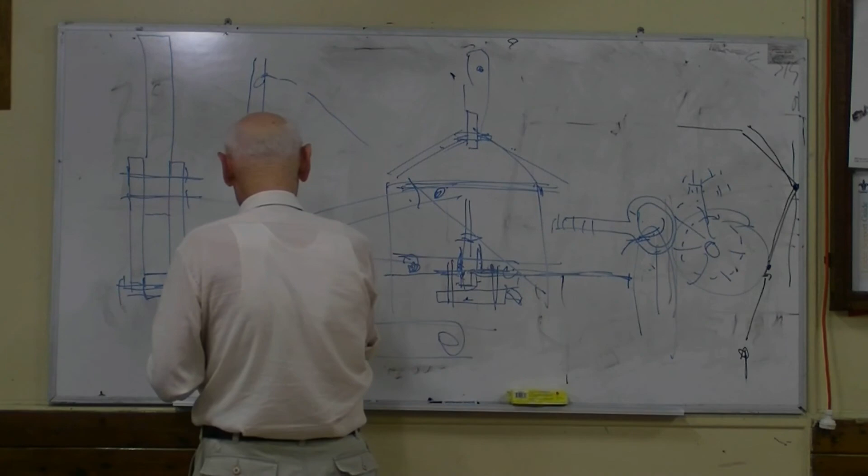When you tighten the bolt up on the timber, don't tighten it to the stage where you crush the timber. You have to hold it but not crush it. I've also, because the bolt was longer than I needed, got a nylon washer in between the stainless steel washer and the timber. The nylon washer sticks to the paint, and the stainless steel washer on the nylon works like a beautiful bearing, so you can lower that mast down without any difficulty.

I have discussed the dipole, the folded dipole, the loop antenna, and the folded monopole. Gentlemen, at this stage of the game, I think we'll call it quits, and if there are any questions, I'd be happy to take them.

How do you feed the loop? The delta loop? How do you feed the delta loop? Okay, well, it's about 120 ohms.

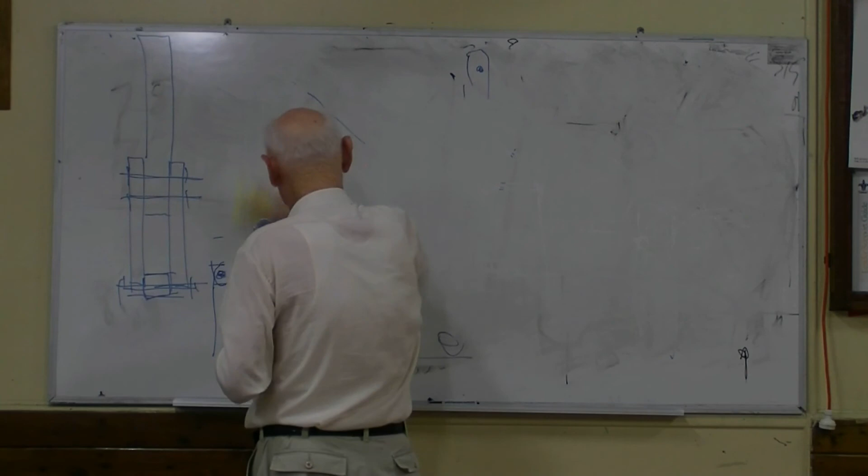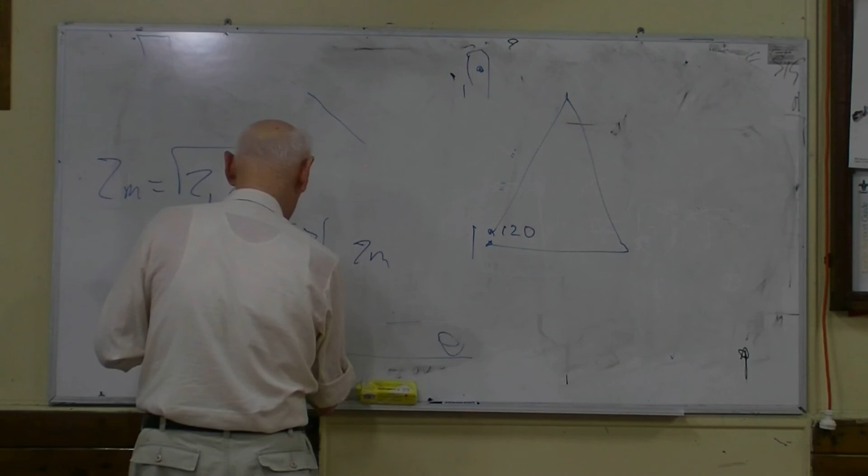What's the square root of 6000? 77. 7, 5, times 7, 5 equals 4,3,1,2,5. What? No, no, 77 ohms. Put 80, that's 6,400, isn't it? So it can't be. Anyway, I've made a mistake somewhere and I can't see well enough to see where I made it. But the point is that it works out at about 75 ohms.

So you need a quarter wavelength of 75 ohm cable in between the antenna and the loop. That'll give you a very nice match, remembering that you're designing this for use on a single frequency.

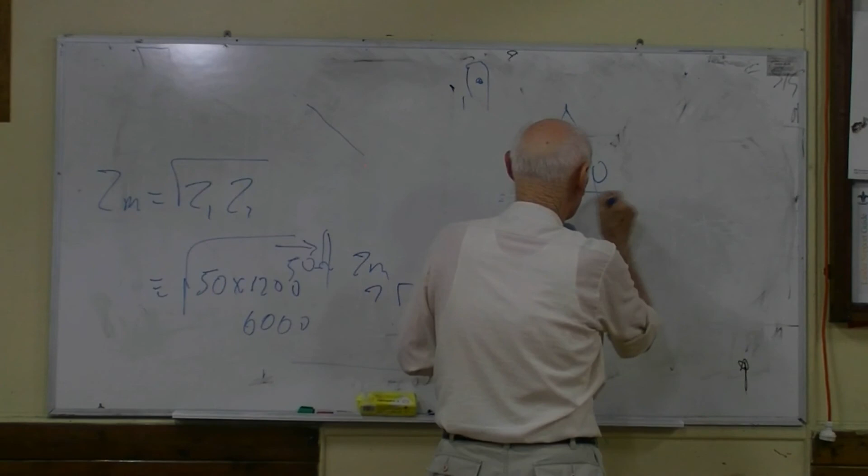Another way to do it, you could use 50 ohm cable all the way. Then you need an impedance matching transformer to go from 50 ohms to 120. Now, 120 divided by 50 is 2.25 roughly, isn't it? So you need a transformer with an impedance ratio of about 2.25 to 1.

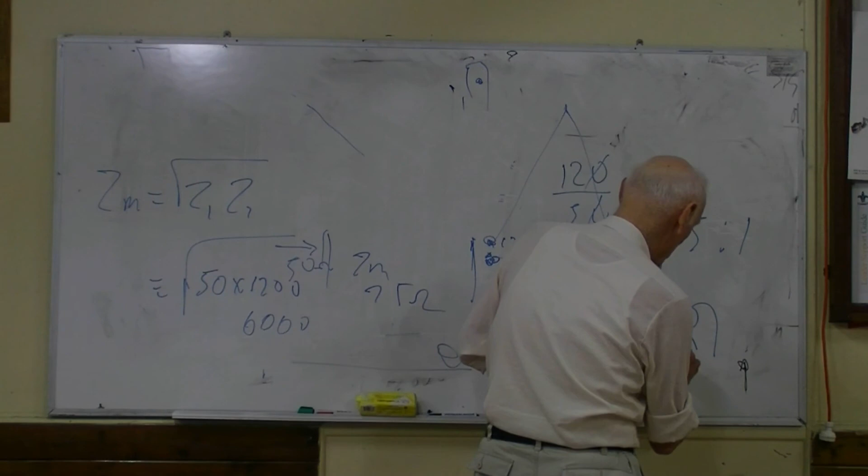Now the turns ratio is the square root of the impedance ratio, or put it another way, the impedance ratio is the square of the turns ratio. It works out at 1.5 to 1. So if you have a transformer with 3 turns here and 2 turns there, that's 1.5 to 1.

You can wind that yourself by getting a toroid, and you use 5 wires, twist them together and wind them in parallel - 1, 2, 3, 4, 5. So you join that one to that one, that one to that one, and you've got that point there and that point there.

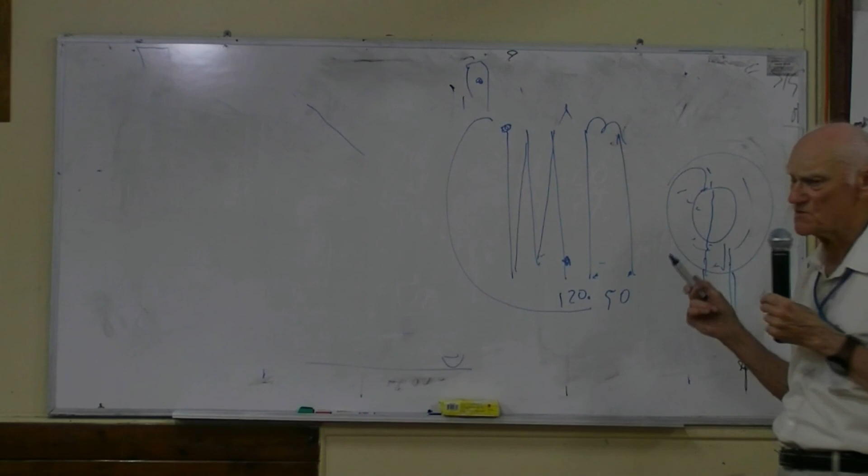The impedance between those two is 120 ohms, and the impedance between these two is 50 ohms. So you just have a toroid, wind your 5 wires around it, connect 3 of them in series, and take the other 2 away with your 50 ohm cable. You can connect the earth end to somewhere in the centre or even to an end, but it's all a bit haphazard. Nevertheless, that is the turns ratio you need, 1.5 to 1, and it'll give you the correct impedance ratio transformation from 50 to 120 ohms.

If you have a modest amount of money, you can buy one. There's a company over in the States, I think they call themselves Balun Designs or something, you'll find it on the internet. They make one of these special impedance matching baluns which uses the two-core design - the first one which simply transfers 50 ohms to 120, and the second one which is a balun. You could use that and it would work perfectly.

Another way is you can use any length of - no, I won't go there. That's the best way to do it, to use a 75 ohm quarter wave matching section in between the loop and the feed line.